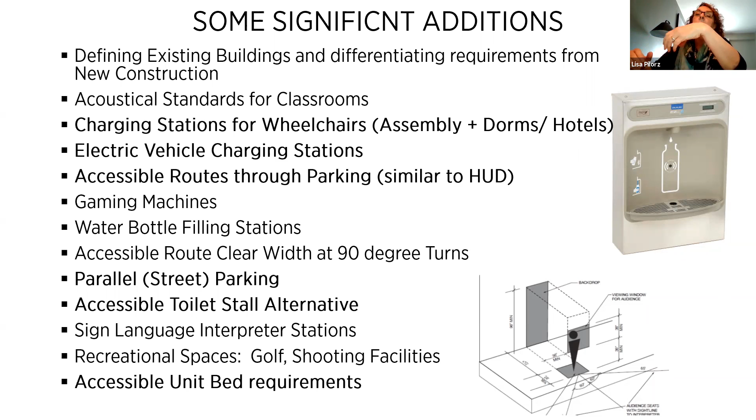These are some of the clarifications and modifications that are quite significant in the different sections. For the first time, we've got new language on construction tolerances, clarifying how you can apply them. Massachusetts is still the only code that defines what's acceptable for dimensions. They've added scoping language for rounding down—Massachusetts has always had that in 521 CMR, but it's not true of the model building codes. It was sometimes understood but never spelled out before, so now there's an actual chart to follow for rounding down.

Probably the change everyone's most familiar with is the turning spaces—T-turns have increased in size. These are model building blocks, so they impact many other sections within the code. Clear floor space has also increased to account for the sizing of power devices, and that's also a building block—we'll see how that plays out in different sections of the code. Operable parts have also changed quite a bit, which we'll talk about further.

It's very nuanced, and that would take another training day, so I've not got that included except in one area, but you'll see it's well worth reading through that section to see how that plays out.

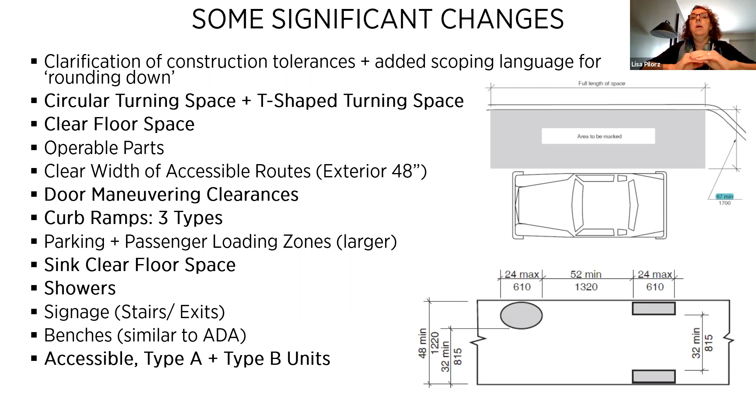And then we'll do a few slides at the end on the different unit types and the highlights of what has changed for an accessible unit, a Type A unit, and a Type B unit.

I think something to think about, and I'd be very interested to hear if anybody's been using this as you're learning about the changes. These are just a very short slide to talk about how things will start to change in the design world based on these changes.

So we now have larger clear floor space and turning space. How is that going to impact the designs we're all making? You'll start to see the need for larger shower clearances. So will that mean the bathrooms will start to get bigger? Will the hotel rooms, those units, be bigger?

The larger spaces now needed to accommodate a parallel approach at transaction counters — so again, that lobby desk, the transaction counter at the hotel, all that kind of thing will start to come into play.

The exterior accessible route, I think you'll see that change happen in parking garages as we start to accommodate the need for wider walkways, combined with the added need for a separated route. So we're seeing some things that will, in general, just start to create the need for larger spaces.

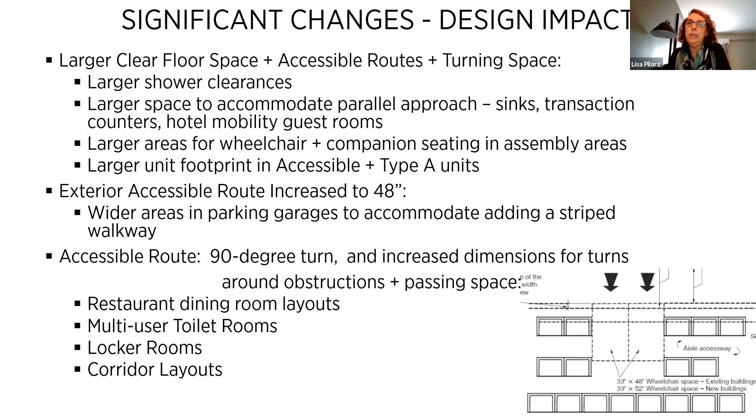And this new accessibility route with the 90-degree turn requirements, I think that may have an impact in restaurant and dining room areas, multi-user toilet rooms, locker rooms, places where you have tight turning to get in and out of them, corridor layouts where you have passing space. It'll be interesting to see the impact on this.

So let's go in a little more depth about the new changes out of that list we just talked about. First of all, there's now a requirement for when you are providing wheelchair charging stations — these bulleted points that you'll see in the slides coming up are sort of the basic requirements needed.

Where they'll have an impact is right now, as of this writing, hotel guest rooms, senior living units, and dorm rooms — anything that requires a true accessible unit to be provided under the codes, under the Chapter 11 codes — that's where you'll need to provide one and make sure it meets these requirements: having a duplex outlet, clear floor space, and within accessible reach range.

It's not required yet in assembly seating, but when you provide it there, you'll need to meet these requirements. So think about places where a user might be for a long time, like at a theater. Similar to an EV charging station, there aren't requirements usually yet to provide electric charging. Some zoning has it, but once you provide it, you have to meet these requirements.

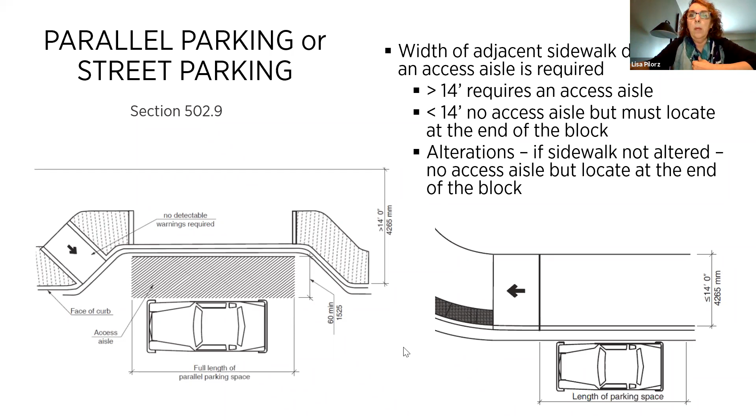Angled parking has changed. The access aisles used to require being on both sides, I believe. Now you can share a space in angled parking, but the minimum has to be 96 inches. So even if two spaces are standard spaces, and normally you'd be permitted to have 60, it is now 96 inches in angled parking, only to accommodate getting out of the car and getting to the accessible route.

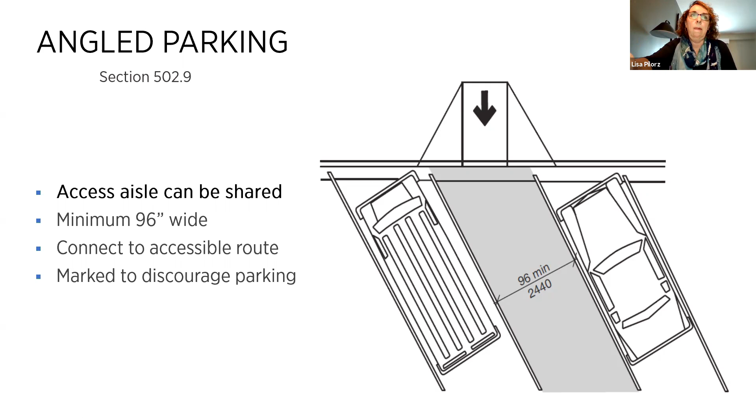I think one of the biggest changes for parking is now a requirement for an accessible route through parking areas. This aligns very much with HUD—that's always been a requirement in fair housing under the HUD guidelines. The intent is for keeping people safe; whenever there's crossing and being adjacent to vehicular routes, it's been important to separate out the pedestrian accessible route.

Typically it's done with striping, but there's a couple of exceptions to it. Of course, you don't need to provide it at a drive aisle and accessible spaces at passenger loading zones, but otherwise there does need to be some separation.

I think the impact is that you'll start to see larger, possibly garages, because you'll have your vehicular route requirement and the accessible route, which is minimum 36 inches inside an interior space. And in parking lots, we're now dealing with a 48-inch accessible route. So I'll be curious to see how this plays out, especially in parking garages.

Similar to the ADA, though, there is not a requirement to provide this path behind the parking space. It's understood there, and you can see that when you open up and look through 2017.

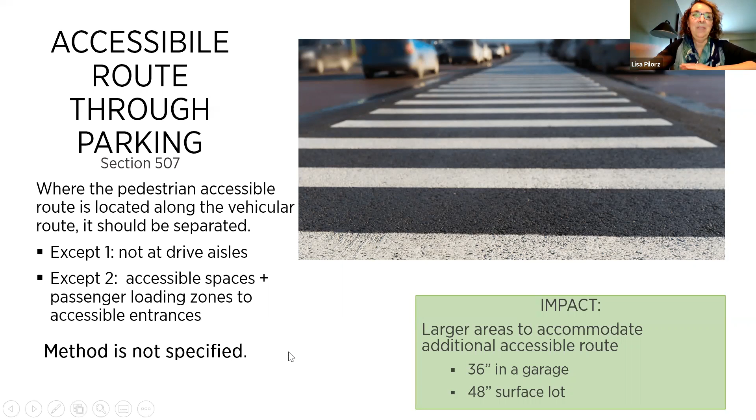This is brand new. There's an alternate layout now—the traditional one is still in place, but there's an alternate. The reason for this is to be able to swing the door in some situations, to also provide that 30 by 52 inch accessibility clear floor space adjacent, as an easier method for transferring to use the toilet. So there's an alternate stall type up there. Those were some of the new things added—there's more, but those were some of the highlights.

I thought we could talk a little more about the modifications made to existing things already in place. Turning space is already in place in the ANSI codes; now they've changed it and increased the size, so we now have a 67 inch turning space requirement in new construction.

There's also now, for the first time, limitations on the amount of space you can share with another clearance. For example, turning space is often required in a bathroom, and so is clear floor, knee and toe clearance under a lavatory. You used to be able to put the turning space under there with no limitation by the standards. Now they've put clear requirements on how much you can overlap and share that space. In Massachusetts you can't share that at all—it's outside of that. But in other states you pretty much had carte blanche to put the whole circle underneath, which didn't really make sense since there are pipes under there, but there weren't any restrictions on it. So now there are additional restrictions to pay attention to.

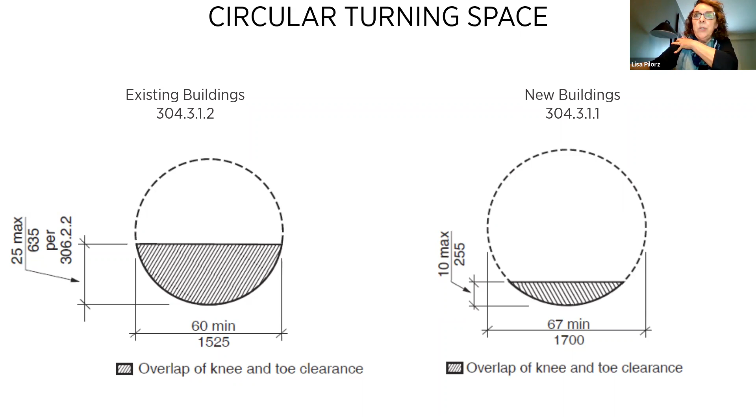Similar to the turning circle, there are restrictions on the amount of overlap that can be used under the space. An impact to pay attention to is base cabinets. If you're designing kitchens or bathrooms and need that T-turn, there was always an understanding that you needed a minimum 36-inch base cabinet. Well, if you're using option 3, you definitely need a larger than 36-inch base cabinet. So that's something to be aware of—where these T-turns are used and how it might impact other elements in the area, like speccing your base cabinets.

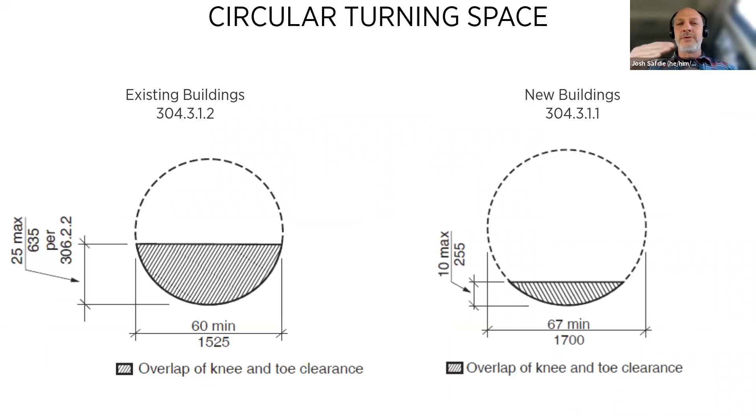Lisa, sorry to interrupt again—could you go back please to the slide with the new alternate toilet stall? There's a question in the chat saying that new bath stall was only 60 inches wide. How does that work?

They haven't changed the width; they changed the length of it, primarily to account for being able to put a 30 by 52 inch space adjacent to the toilet. That's my understanding of the reason for the length of it.

Normally, not coming from Massachusetts—Massachusetts already had longer toilet stalls, so think about projects where you are not in Massachusetts, though I don't know if that has the impact. Toilet stalls have a minimum depth under the ADA and previous ANSI codes, depending on whether you have a wall-mounted or floor-mounted toilet, of 56 or 59 inches deep. Now they're expanding that to 84 inches to account for clear floor space to be provided next to the toilet.

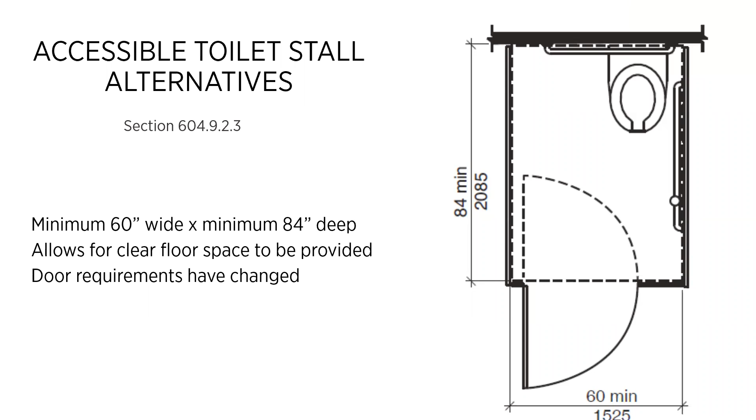Sorry, when I said how does that work, I meant with that 67-inch turnaround when you've got a 60-inch bathroom stall—I was wondering how those two things interact. Say that one more time, it was hard to hear. I was saying with the 67-inch turnaround and the 60-inch bathroom stall, how do those two things interact?

The turning space—this is meant to be just for a toilet compartment, not a toilet room. So you can provide the turning space outside in the larger multi-user toilet room; it does not have to be provided within the stall itself. These are toilet stalls, so the image is just showing you the one, but this is obviously in a multi-user toilet room versus a toilet compartment that also has the lavatory in it. Thank you, does that answer it? Okay.

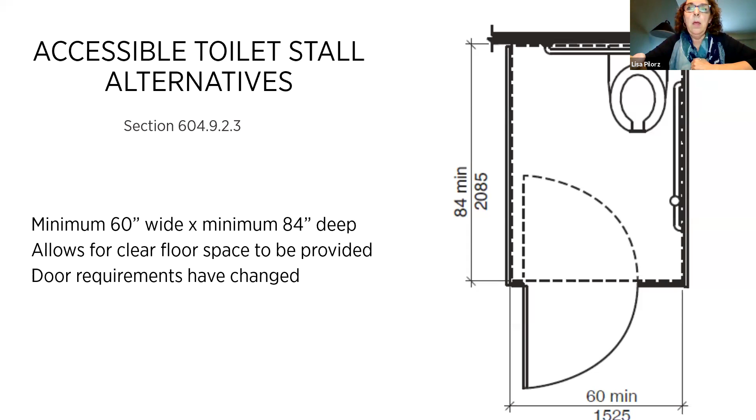Good question, though. Okay.

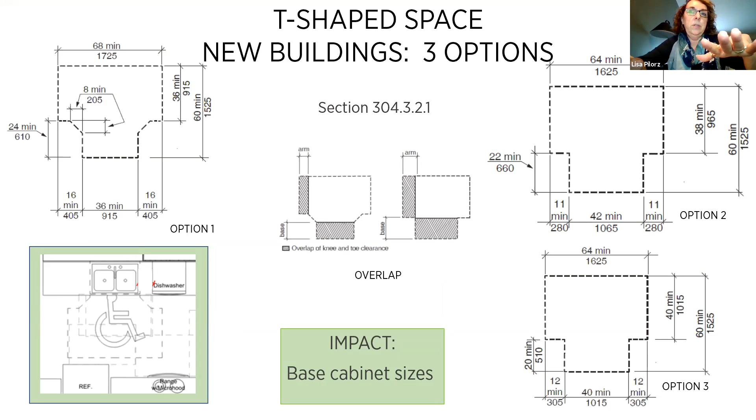Anything on T-turns? Although there's one more—I'm sorry. In existing buildings, we still have the use of what we're all familiar with for T-turns. That's pretty traditional in this 2017 version—in existing buildings, you're permitted to basically revert to what you're used to, what has been in all the ANSI codes up to this point, and it's in new construction where the newer, larger sizes are coming into play.

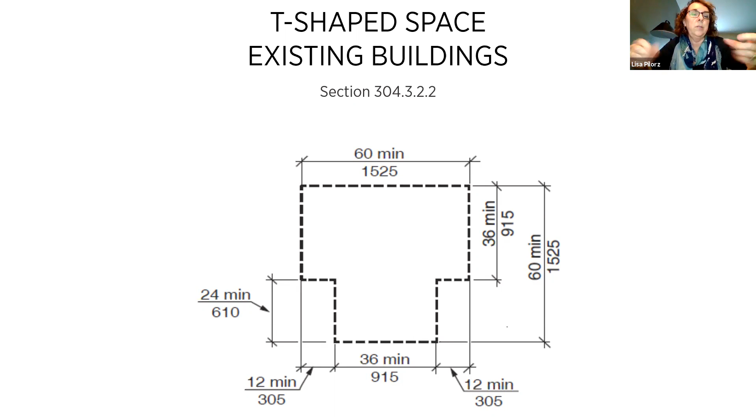I think this is also one of the biggest significant changes: the increase in the clear floor space. It has changed by 4 inches, which on one hand doesn't sound like much, but on the other hand we all know spaces are tight, so it will have a big impact. This building block you will see referenced in many areas throughout the codes.

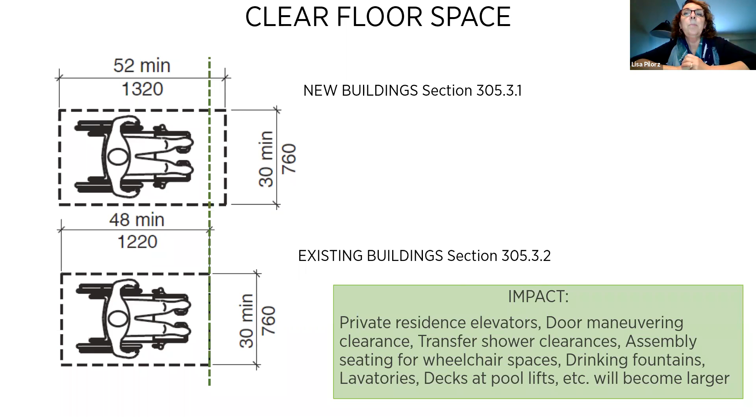I think the impact to pay attention to is private residence elevators, door maneuvering clearance—which we'll have another slide for—transfer shower clearances, that's got to get bigger. Assembly seating in schools, in theaters: the wheelchair space is now longer, so that's going to have that domino effect on seats, rows of seats. Drinking fountains again, the impact for how to provide that if it's a tight space. Pool lifts, you have clearances at the decks, and if your decks are interior, your size is limited. So basically everything's growing.

Here's the door maneuvering clearance, one of the instances where it has changed—that 52-inch growth is there. So in new buildings, you have to make sure you have that full clearance to accommodate a push side.

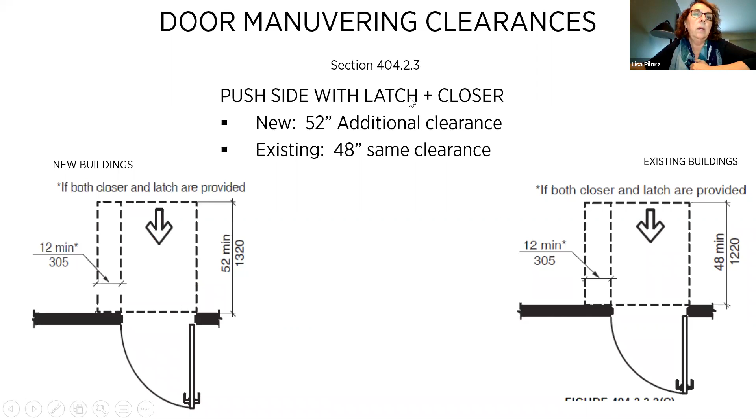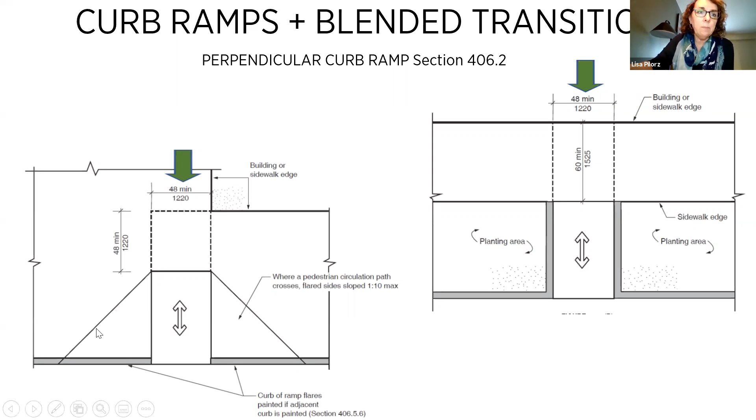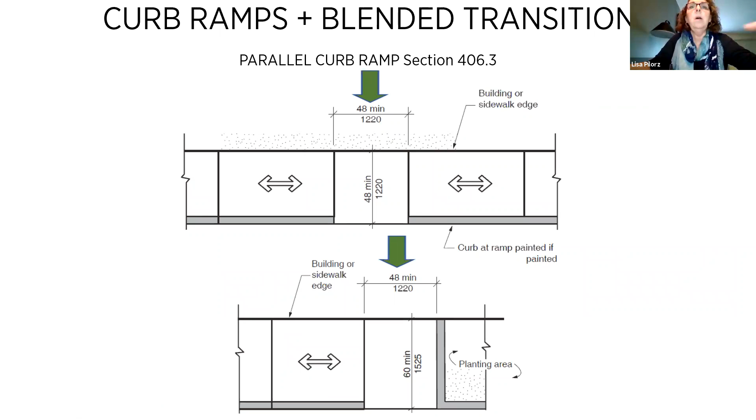Sorry, I have to keep moving this around. The parallel curb cuts are similar. There's a requirement for the landings, again, to be wider—I think traditionally it's been 36 inches.

We also now have a blended transition acknowledgement. What's new on this is a little bit about where it can be located, how to locate it, how to make the grade breaks work. I think we've seen more of that in Massachusetts, so those of you designing here and in other states are a little more familiar with this, but this is newer and a modification for how it's being identified for the technical requirements. It's lining up much more with ADA and the PROWAG, if anybody uses that.

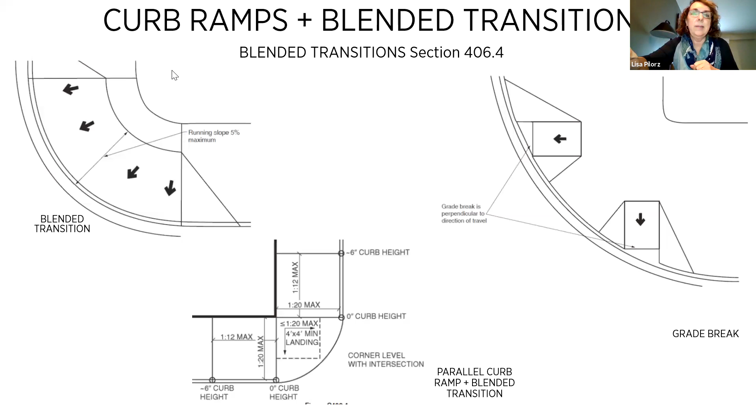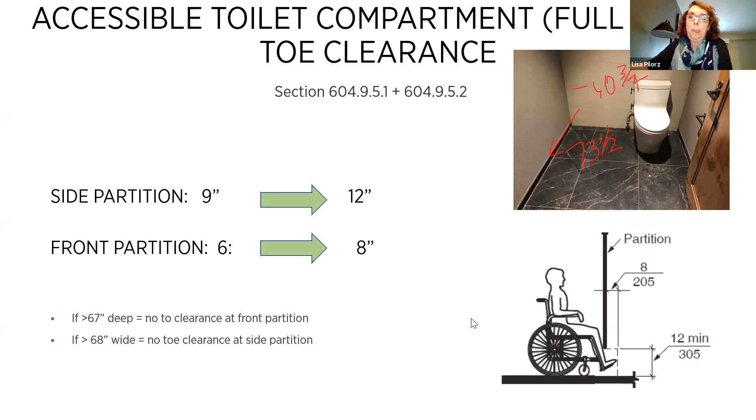Clear floor space is changing. They have taken away the requirement that when you're only providing a parallel approach, you're no longer required to center it on the sink. That was always a requirement before. So there's 3 exceptions for providing a parallel approach. Otherwise, you do need a forward approach.

But when you have a kitchen where there's no cooktop, where you are using sinks with children under the age of 5, or where it's just a wet bar, there you can provide a parallel approach. And now when you are allowed to provide a parallel approach, it no longer needs to be centered on the sink. So that's a very big change.

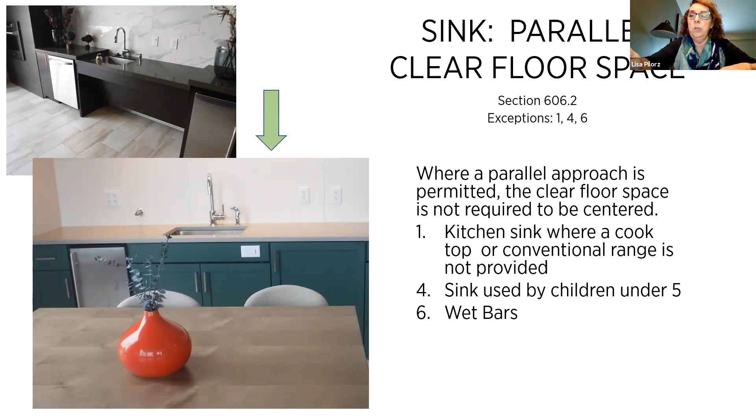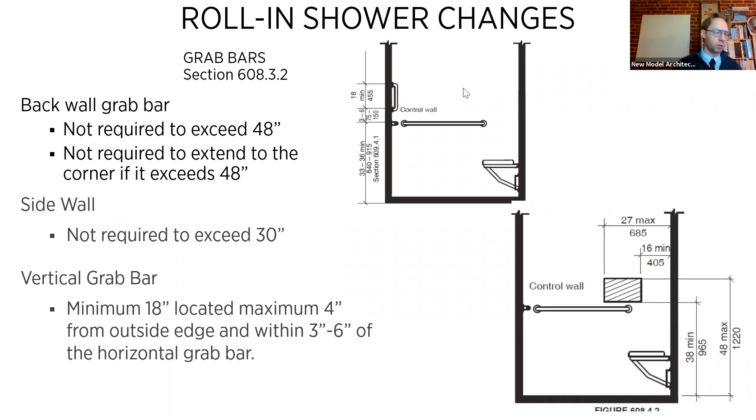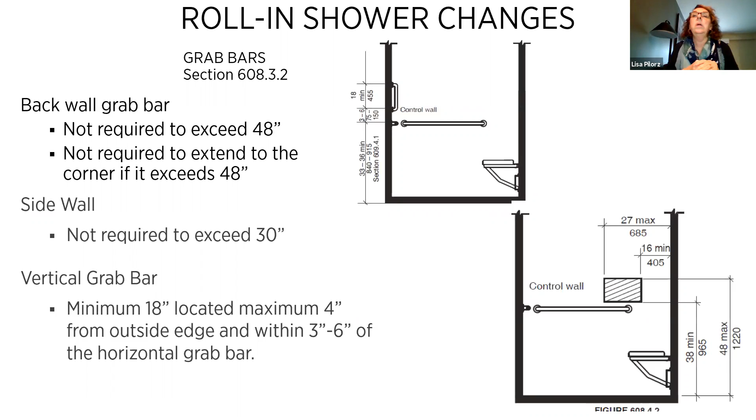Lisa, just a quick question. On this slide too, that little crosshatched box right above the grab bar—what is that? That's showing you the location for where the controls go. Oh, the controls, I'm sorry. Yes, sorry, did I not... Is that on the next one? Nope. Yeah, sorry, so some of the slides overlap—they show both controls and the grab bar. So that's making reference to the next slide.

Handheld shower controls have changed a little bit as well. They've basically gotten more stringent in the alternate roll-in shower for those of you that might design that at times. It used to be you could be on either side; now they only are allowing it on the outer side, as you can see from these sections. And the same for the side approach. So in the alternate showers, they've tightened things up a little for where you can locate the controls.

So I thought we'd take the last couple of slides and talk about what's changed for the 3 different types of units needed on projects. Chapter 11, in this version of the code, is now where you'll find the technical requirements for the 3 different types of dwelling units. Section 1102 refers to accessible units—those are the most stringent units. You find them in hotels, dormitories, long-term care like nursing homes, and senior living.

And so there's been some changes. Section 1103 refers to the type A units, primarily for multifamily projects, and the same for type B. So we'll do three last slides on that before we jump into the HUD stuff.

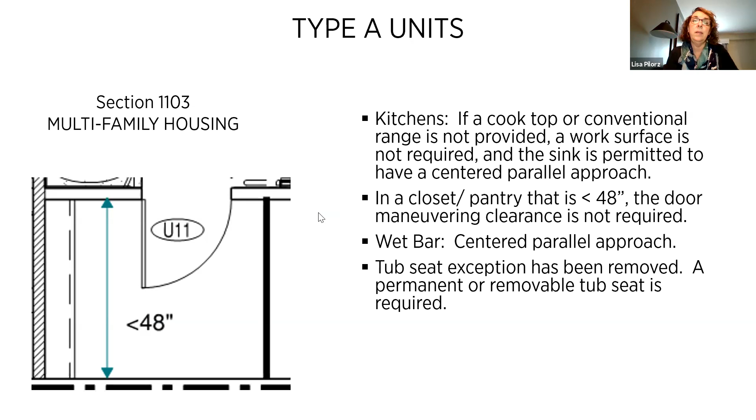I think the meaning for this might be that it will start to dictate the tub heights in Type A units. In Massachusetts, we already know that in a Group 2A, you are restricted to a 16 to 18 inch high tub. That's never been the case in ANSI Type A units. So I think as this plays out in the states that are adopting it, we'll see this come up more.

And lastly, in multifamily housing for Type B units, these are the less restricted. The majority of the units on your project are considered Type B. They line up somewhat with Group 1 in Massachusetts, but not quite. They have different requirements too, but they definitely line up with the Fair Housing Act requirements. So there's much more coordination now and similar use.

So whether in new construction, you can still use the existing old clear floor space requirement for everything needed in a Type B unit, 30 by 48. Mailboxes, they have finally defined mailboxes, which get to be a sticky area, but all mailboxes for Type B can be similar to HUD and Fair Housing, 54 inches for an unobstructed reach.

The accessible route has new exceptions as we've talked about, so that will be different to Fair Housing, they'll be larger. The operable parts is quite different, and I'm going to talk about one big part of it in the next slide, but it's got some very nuanced areas around operable parts. So definitely pay attention to that when you're designing Type B units.

Refrigerators can now have a forward approach that's offset. For years, ANSI's allowed a parallel approach to be offset at refrigerators, but now they're allowing the forward approach to be offset too. This is different to Fair Housing, so be aware of that.

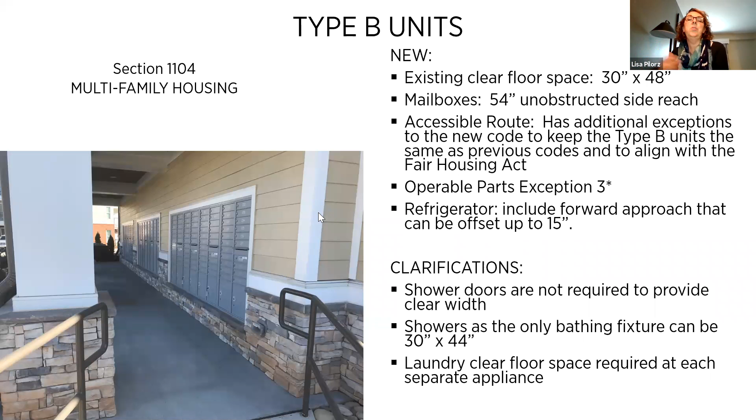I guess there's been some confusion that I wasn't aware of, that clear floor space applies to each laundry appliance. So when you don't have a stacked one, but you have the side by side, it applies to each appliance.

And I think the last slide related is the operable parts, and all the exceptions - there's about 8 or 10 in there. This is a significant one for multifamily. They have now acknowledged another exception where you can't provide clear floor space, so they have some parameters around these corner conditions to alleviate being able to provide an outlet there.

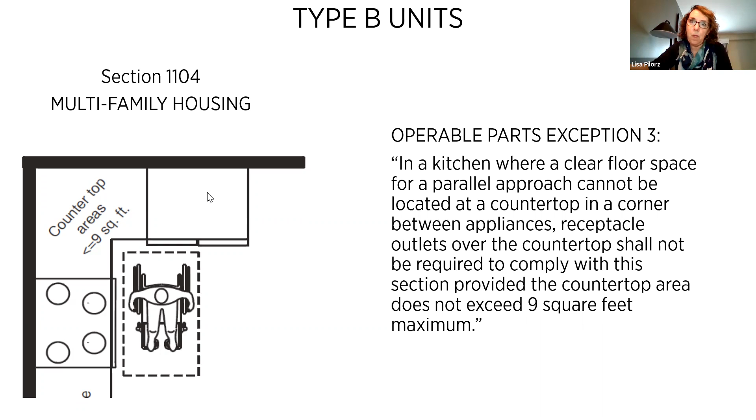And I think that's it for the ANSI section of this. So before we move on very quickly to HUD and the safe harbors that have changed, any questions? We good?

Okay, so in the last bit of this, before we turn it over to John, HUD applies to all new construction for multifamily housing. As we've already alluded to, it is a civil rights law, not a building code. So to meet the design and construction requirements of fair housing, most projects build to a sanctioned safe harbor.

HUD periodically announces what they consider a safe harbor, often one of the ANSI codes. There are some other safe harbors. If you choose that and design and meet the technical requirements under these sanctioned safe harbors, your intent is that when you're all said and done, you should have met the requirements for fair housing.

HUD has most recently adopted ANSI 2017, as well as IBC codes 2009, 2012, 2015, and 2018 as safe harbors. In the accessibility world, we've been waiting for this for a long time, and it finally got approved around December or January, and it took effect last week on March 8th.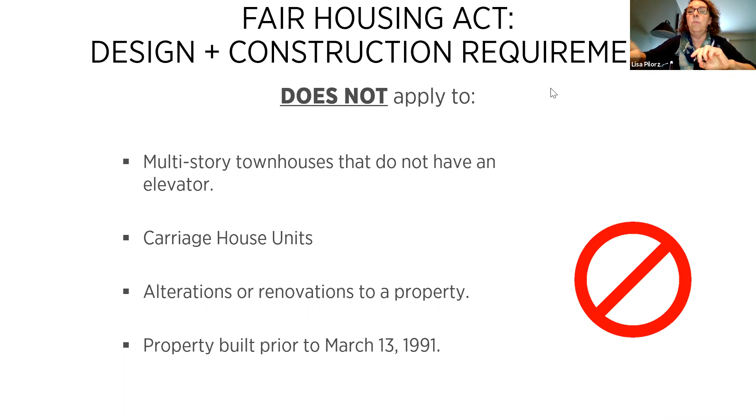And again, the Fair Housing Act requirements are these 7 general things. HUD has sanctioned ANSI 2009 as meeting all of these requirements that fair housing asks for. They put a lot of work and effort into sanctioning safe harbors. So if you choose 2009 as your safe harbor, you should meet all these requirements.

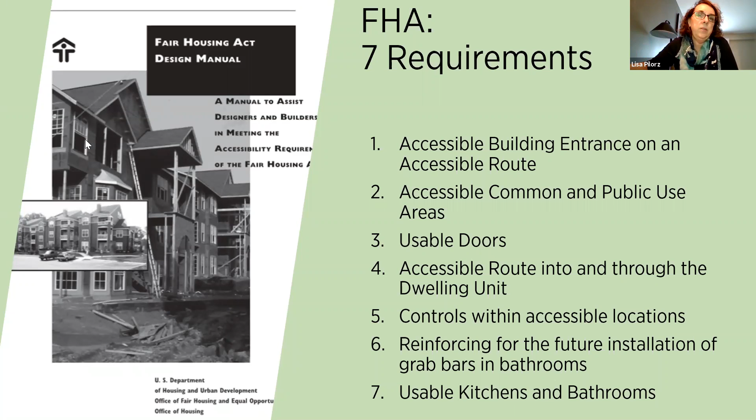I think it makes the most sense to use this as your safe harbor in states that have already adopted ANSI 2009. A state like North Carolina, for example, has already adopted it as part of their building code, so it would make sense to choose it as your safe harbor. It's one less code to meet.

When you're in multifamily housing, you're under multiple codes and they can conflict. This way you're aligning, you have one code. You're not in a unit wondering whether the toilet centerline is 18 or 16 to 18. They're now going to be aligned to say the same thing. There'll be less confusion and less conflict.

And I think some of the areas where it's beneficial is where they line up now: 16 to 18 will be allowed both in common areas and in the dwelling units. Common area sinks now will have a centered parallel approach allowed. You can always provide a forward one, but you're no longer required to.

In units, the clear floor space can now be offset and not centered on the appliance, which is beneficial both for designing and for the functional use of the appliance.

And in type B kitchens, there's finally an acknowledgement similar to fair housing that you can have that counter depth at 25.5 inches. It's always been sort of understood, but technically was still supposed to meet 24. So that is some of the advantage to choosing this as the safe harbor.

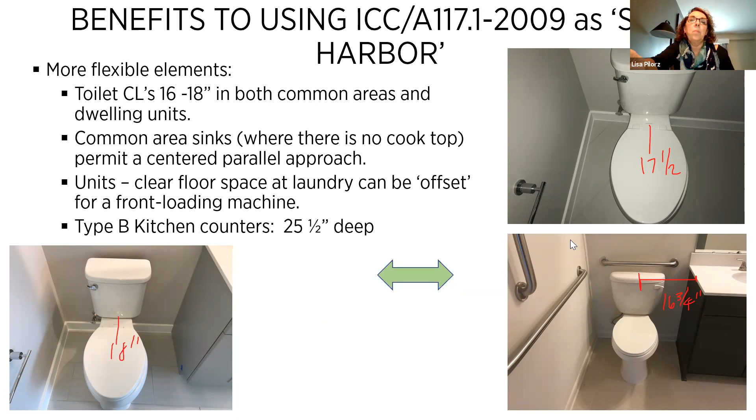You can still keep your toilets at 18, but they can now be 16 to 18. I think some areas where it's more strict, but in a sense it doesn't matter because you're already having to build it for the local code requirement, is the unit entry doors.

HUD didn't require maneuvering clearance within the dwelling unit at the entry door, but now under 2009 you would. But you're already building it that way for the state you happen to be working in.

Electric panel doors and electric panel boards need to be within reach range, and in common areas unobstructed reach range is lowered to 48 inches. Under the Fair Housing design manual and some of the older safe harbors, you could go up to 54 inches. So that's a change that's more strict, but if you're already designing to meet the building code in that state or jurisdiction, it's still an advantage, in my opinion.

Lisa, sorry, just to quickly interrupt—there's a question here that wants to back up a little bit and have you explain what a safe harbor is.

Similar to building codes you build to, you need to meet the rules of the building code, and ANSI is one of the ways—it's the technical requirements for the chapter that deals with accessibility, spelling out all your technical requirements. Fair Housing is a law, a civil rights law, not a building code, and it covers many things—anti-discrimination, rentals, everything. But as designers and people constructing multifamily housing, we're concerned with the design and construction part of the Fair Housing Act.

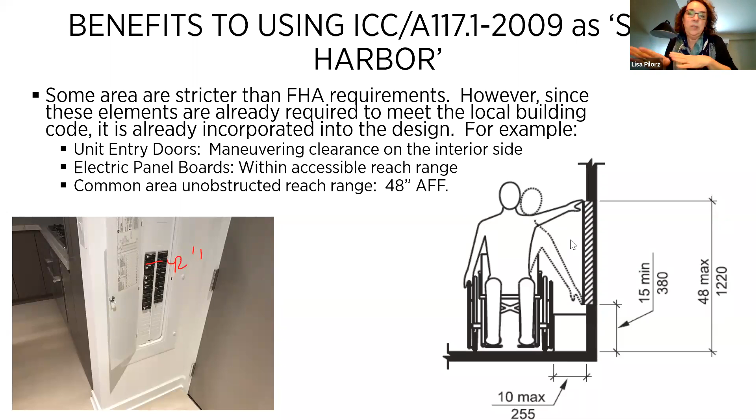Okay, sorry about that, sorry to interrupt you right at the end. Not at all, I'm done. I know John needs to speak, but I'm happy to take questions after, or you can write to me. I think I threw something up there—we're all learning about this as we're going, this is all new, this is cutting edge. But thank you for your time.

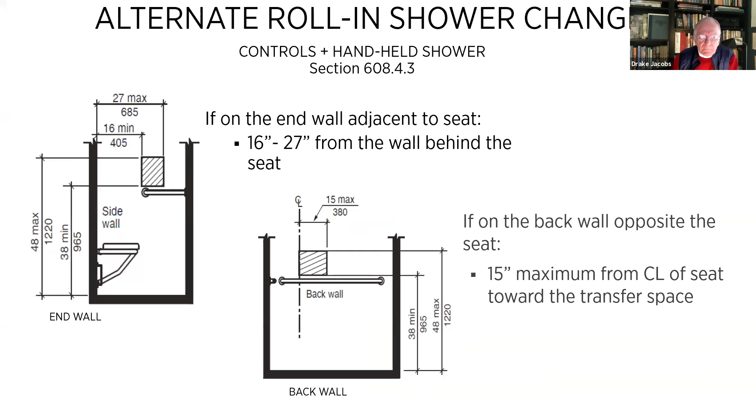Typically the back dimension is 12 inches from the edge of the opening to the back. So any one of those, you would typically look for the back of the seat to the back of the wheelchair is normally 12 inches. Am I saying that right?

So from where the gray seat is to the back where the dotted lines are, is that what you mean? Yeah. I know in Massachusetts we have that code for tubs, not so much for showers. It's to help align, give enough room for your wheelchair so that your shoulder and your seat is lined up to transfer onto that shower seat.

I came up with this a while back with Marsha Mazz from the Access Board, and I was doing a set of lockers and shower stalls at one of the universities. My designer had a very large opening, and they just aligned the shower stalls so they were equally sized, and I said that doesn't look right. So Marsha confirmed for me that the shower opening should be 36 inches from left to right.

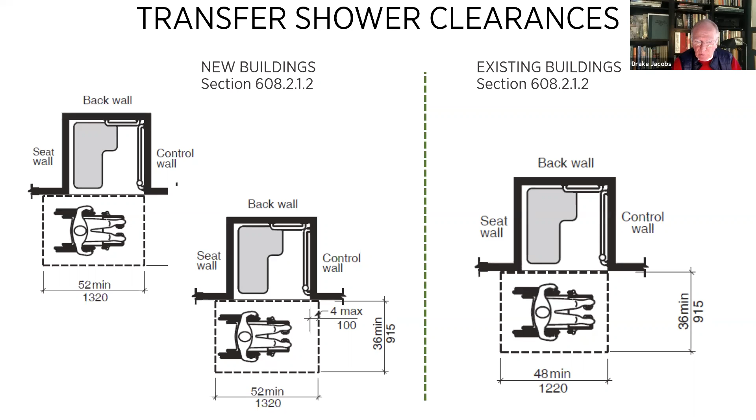I think in Massachusetts, the reason our code is statewide is because the state legislature back in 1972 was confronted with a real problem having 351 building codes. If you wanted to build somewhere in Massachusetts, you had to know the local code basically down to the street. That was so confusing that the legislature got rid of all of that and required everybody to use one state building code, and they also prohibit any local jurisdiction from deviating from that by taking something out or adding something in. The one exception is the energy code, where we have the option for local jurisdictions.

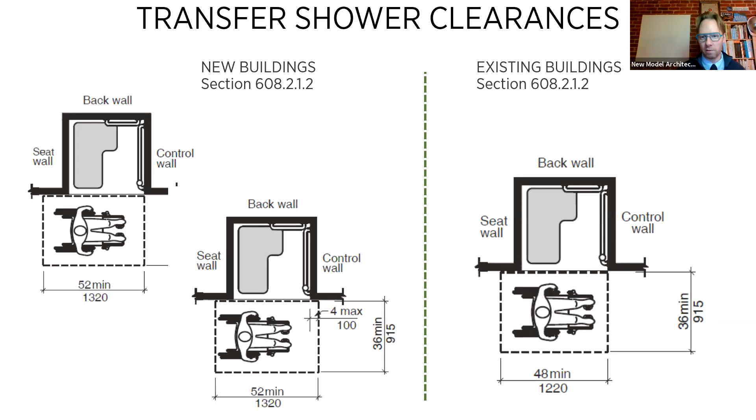Sure, I'll jump in on this. I'll give you the quick regulatory/legislative update, which actually pertains to some of this and to exactly what Drake just mentioned.

Probably the biggest update as it relates to the stretch code, as Drake just mentioned, is we have a climate bill that most of you heard me talk about over the months. It's probably about 3 or 4 weeks away from being signed. The Senate has passed it, the House will vote on it tomorrow, then it'll go to the governor's desk. He'll take his 10 days to either sign it or veto it. Likely he will sign, but even if he vetoes it, there are more than enough votes to override his veto. So I'd be planning for anywhere towards the end of this month or beginning of April for the climate change bill to be signed into law.

Why you may care about that is we, as AIA Mass, were successful in getting some provisions into that bill, specifically a requirement that the stretch energy code will now include net zero building performance standards. So that will be a wonderful win.